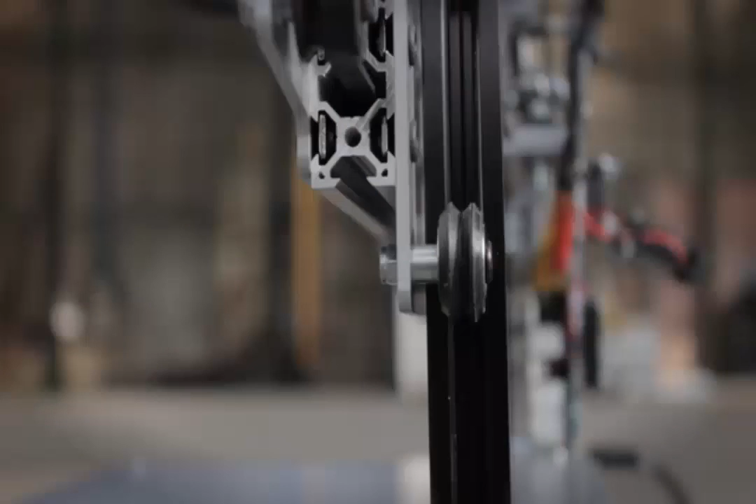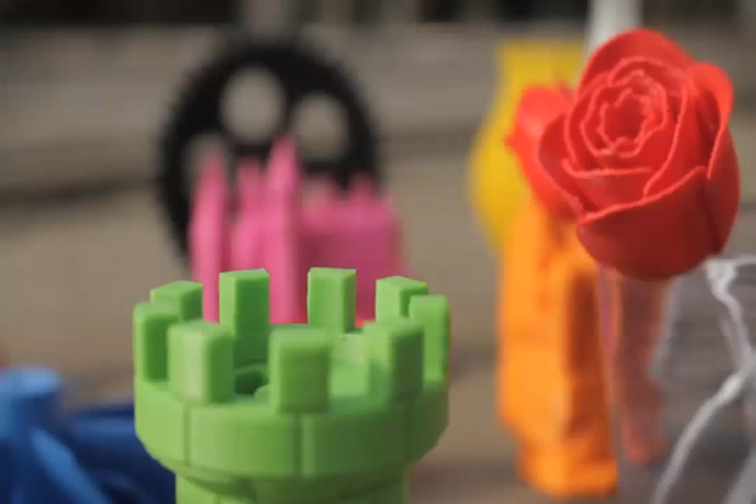Two years ago I saw my first 3D printer and I was immediately intrigued by all the possibilities 3D printing could give you. So I started to build my own printer, and after seeing the prints that came off of the printer, the excitement was even greater than before. It was the first time I could physically produce products at home.

For the last 10 years I worked in industrial automation as an engineer. I designed electronics, software and mechanical designs.

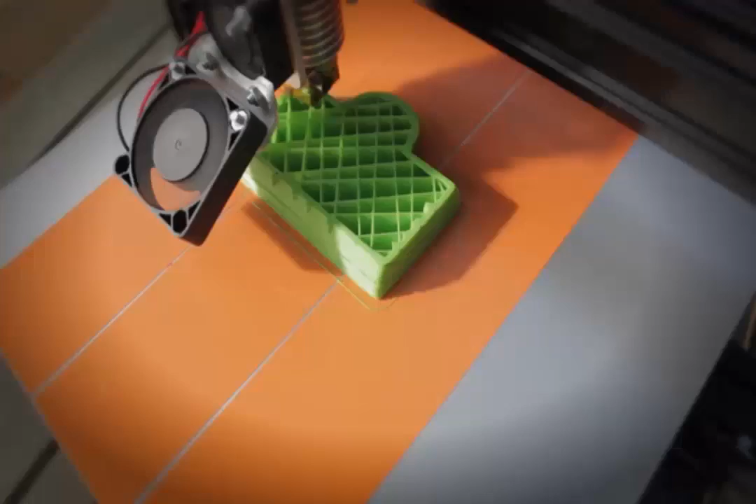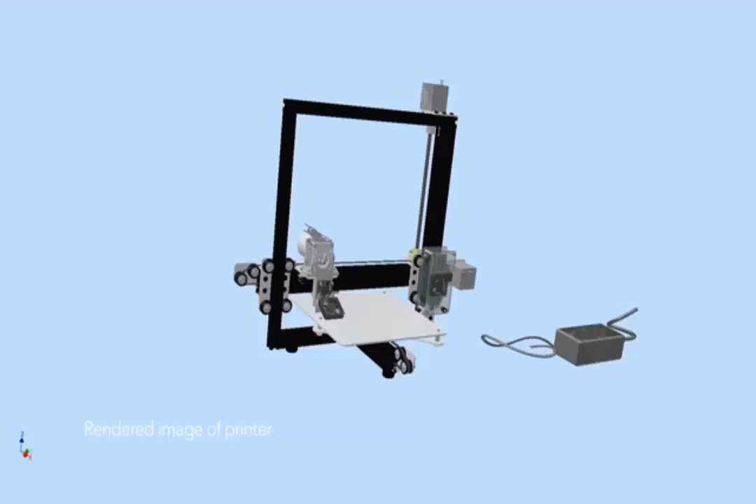Recollecting what was needed to build my first printer and to start using it, I noticed you need some technical skills to complete it and to use it. So with that in mind, I wanted to design a printer that was easy to build and easy to use.

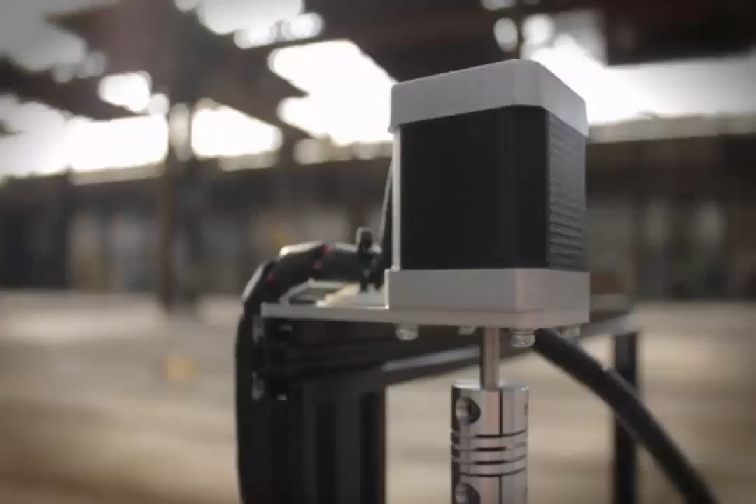So we broke down the printer to its basics, just to focus on high precision, high speed and high quality. The printer is made out of an aluminum frame. It's an open source hardware frame, and together with the laser cut metal plates it makes a rigid printer.

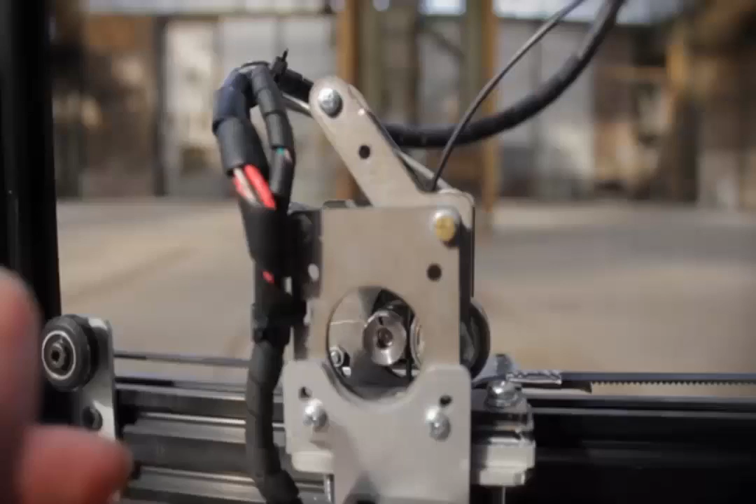We designed a custom extruder drive for the printer, so it is easy to change your filament. You just push back the lever, take your old filament out, put a new one in and start printing again in seconds.

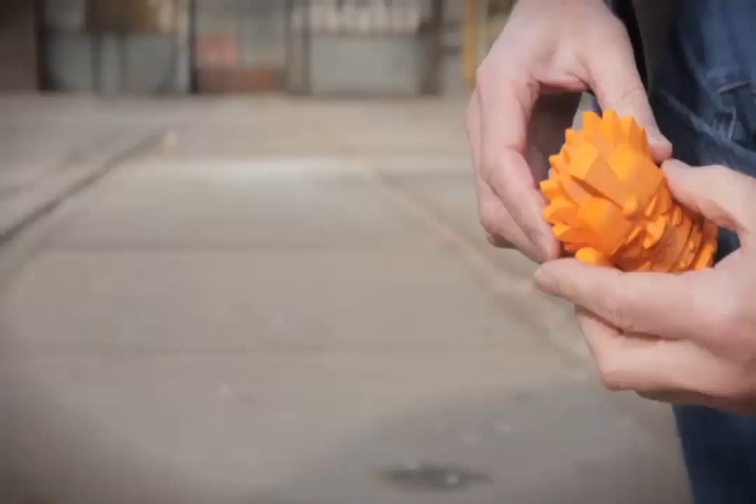So now that our third prototype is ready and finally meets our high expectations, we need your help to not only take it into production, but also share your experience with it. Be part of our community to exchange that experience and give us good ideas to even develop the printer further.

So when you support us, you get a complete building kit to start building your own 3D printer. The kit contains all the electronics, metal parts and screws. We provide you with a step-by-step manual, so you can build your printer in just a couple of hours.

And together with it you get a filament sample package, so you can start printing right away. Step into the world of 3D printing. Start printing your own objects and get inspired by all the great possibilities. Make your pledge today and support us in reaching our goal.

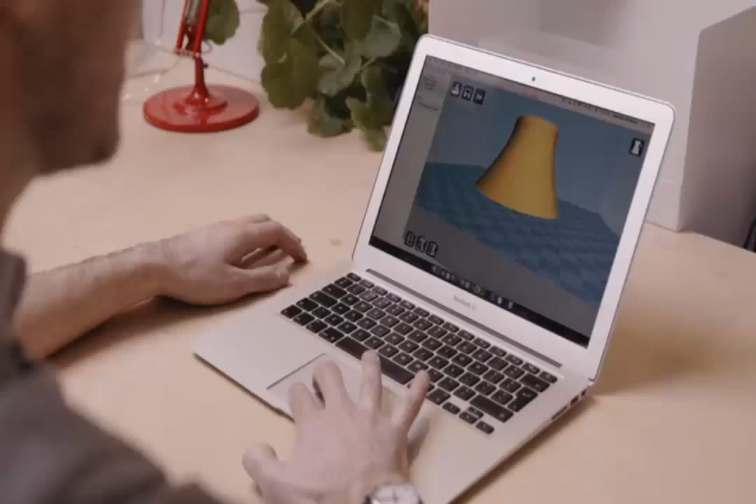Sometimes you don't want to design something from scratch. Explore our online library of projects to see what other makers around the world are sharing. Even use maker machines like your 3D printer with the Formbox. Multiply versions of your prototypes without the wait, and get a factory level of finish from your home or studio.

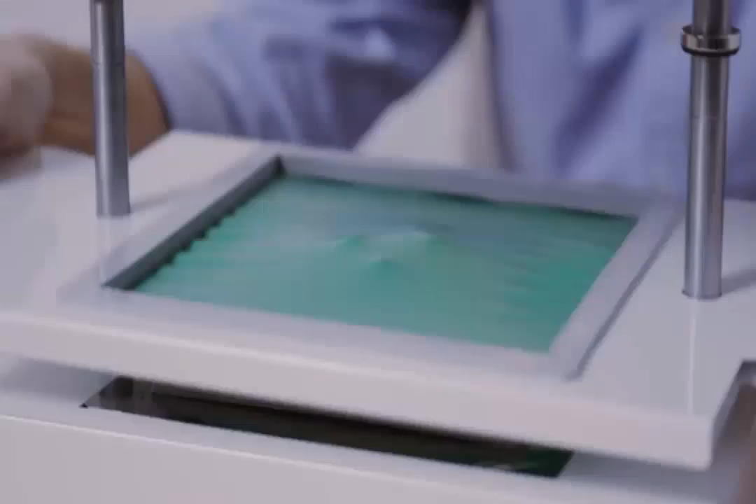We've meticulously designed the Formbox to fit with your life and your ambitions. Making should be simple and not take much time, so you can push the boundaries of what you can make for your customers, your friends, and for people all over the world.

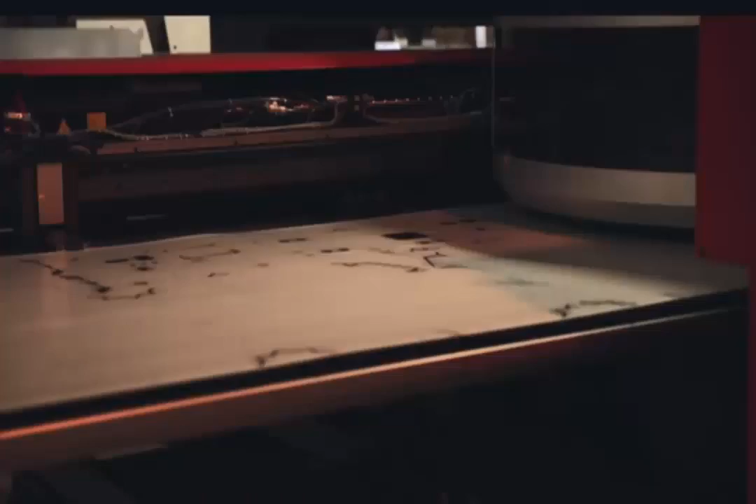We've been testing it with makers and small businesses for the past year and developed a series of prototypes to get to a design we think you'll love. We're working with a great factory. We just need enough orders to start the first production run. And with your help, we can get the Formbox into the hands of makers everywhere.

We want to bring people closer to how their things are made and give them the tools that they need to create their own things, to turn their ideas into reality. And we need you with us to make this happen.

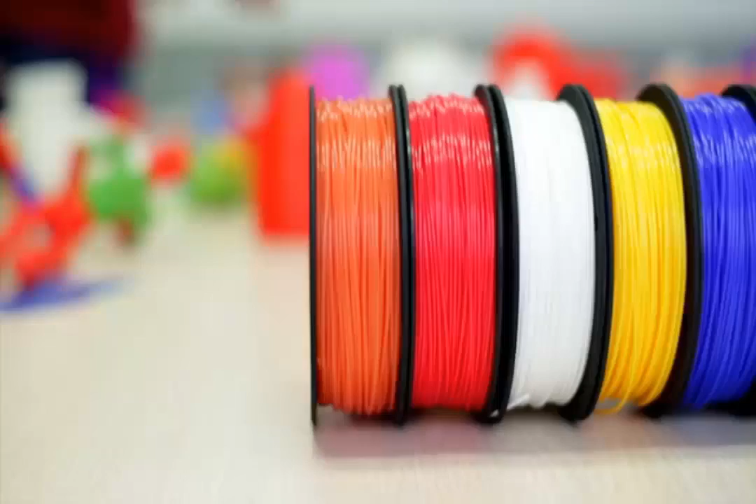We love the design of the 3D printer. The fact that the mechanical parts are hidden makes it really kid-friendly. The different materials, like soft PLA and the FlexiPlate, offer a variety of textures, making the learning experience a lot more dynamic. We also made sure that printing is easy with one-touch printing.

We've been developing the prototype for more than 1 year. With our team of dedicated engineers, we were able to accumulate 2 registered patents and 10 patent-pending technologies to build the safest and first ever kid-friendly desktop 3D printer.

It's pretty cool because you can make many things with it, and by many I mean almost everything. Parents everywhere can feel better knowing that their child can understand and use this technology that's already changing the world.

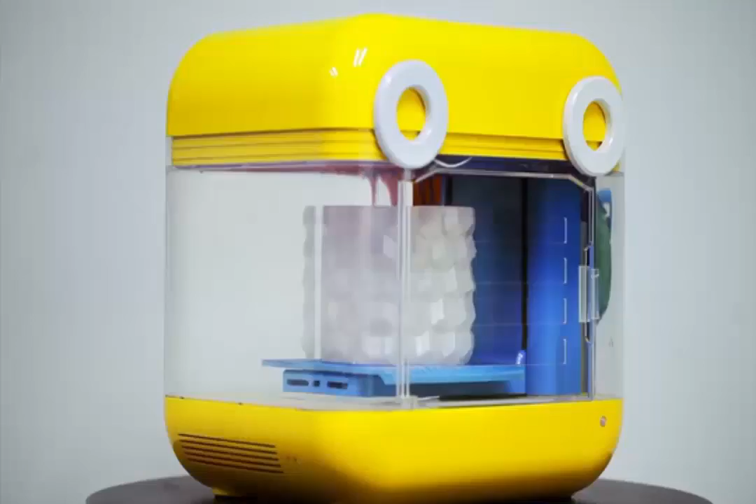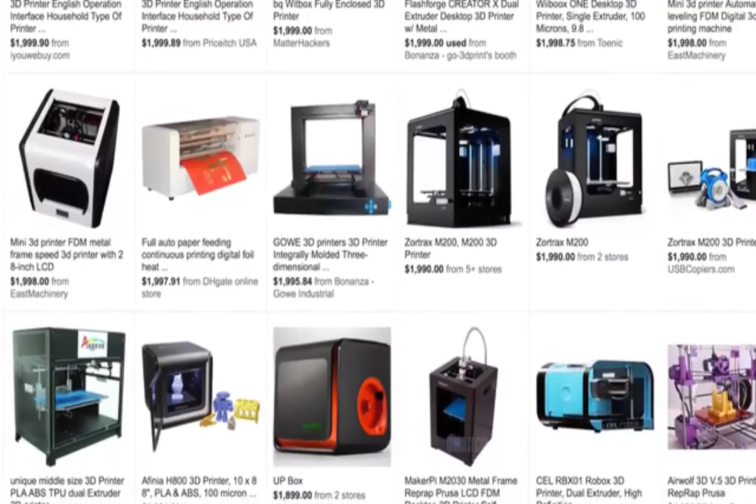3D printing is great, but often inaccessible. Until now, 3D printers have cost over $1,000, and that's just for the most basic versions. At Anvil, we've set out to change all of this. Our 3D printer is easy to use, and at a $299 price point, it's affordable enough that any family can own it. But most importantly, the print quality is incredible.

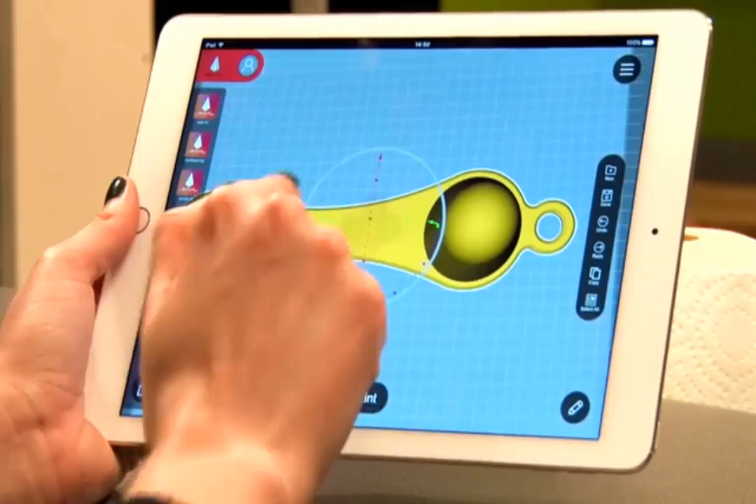We've set out to provide the best user experience of any 3D printer. Unlike other tricky and hard-to-use 3D printers, Anvil is ridiculously user-friendly. For example, it's incredibly easy to load. No more complicated and inconvenient insertion processes like traditional 3D printers.

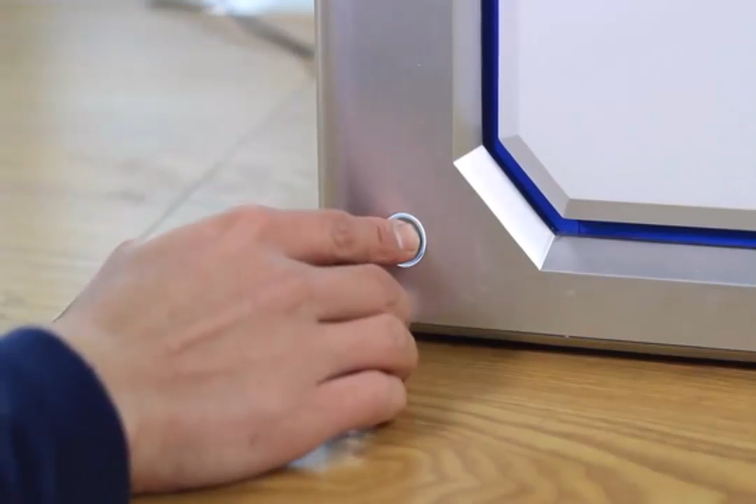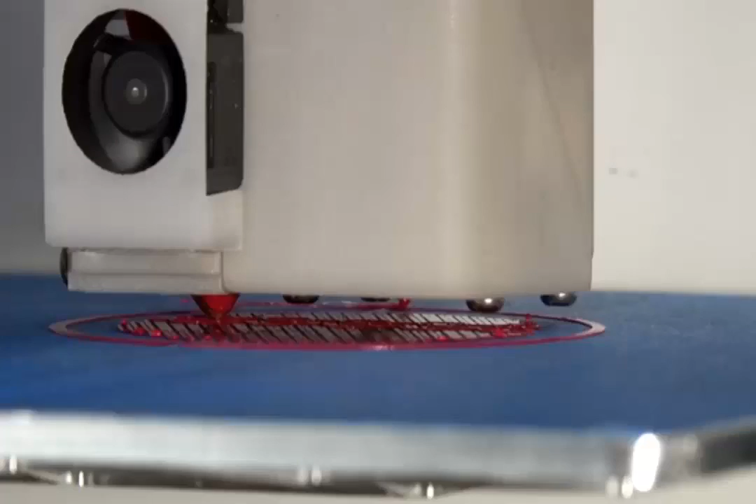Even better, all you need to do to operate Anvil is press a single button. We've designed our printer with an enclosed compartment so you're protected from any heat-related injuries. We've designed every feature with you in mind so that you can create anything you can imagine without any training or previous knowledge of 3D printing.

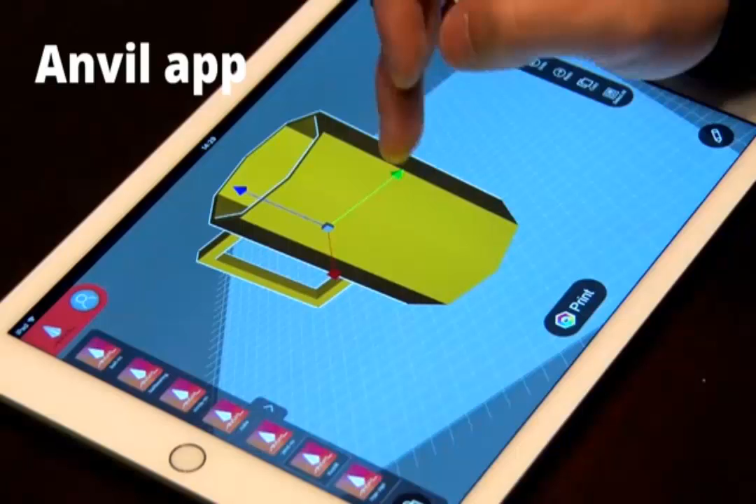Our printer allows you to design anything using our app. We've built the software to look like Legos. You put your design together on an iPad using blocks and then print your design. Our app is the key to turning your ideas into reality. And we've made sure it's easy enough for everyone to use without any prior experience.

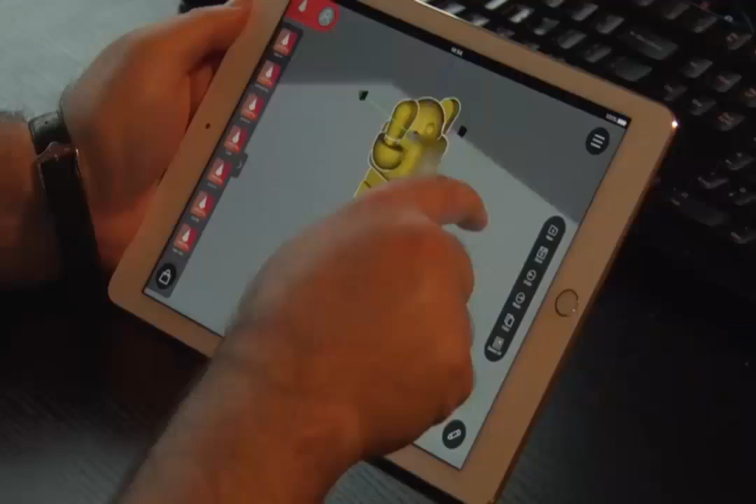As long as you have access to the internet, you can control your Anvil 3D printer. Now you don't have to wait until you get home to make your great idea come to life. It's as simple as opening up the app and clicking print. You'll never be caught unprepared again. If you're thinking of something you're missing, just print it.

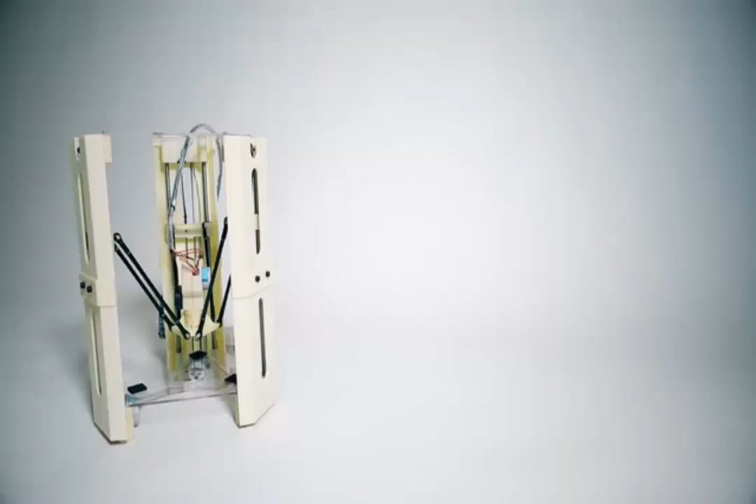What if you could, with a few clicks of your mouse, 3D print a toy for your child in the comforts of your own home? What if you could create gifts for your friends in minutes? Introducing the 101 Hero Mini 3D Printer, the most affordable 3D printer in the world.

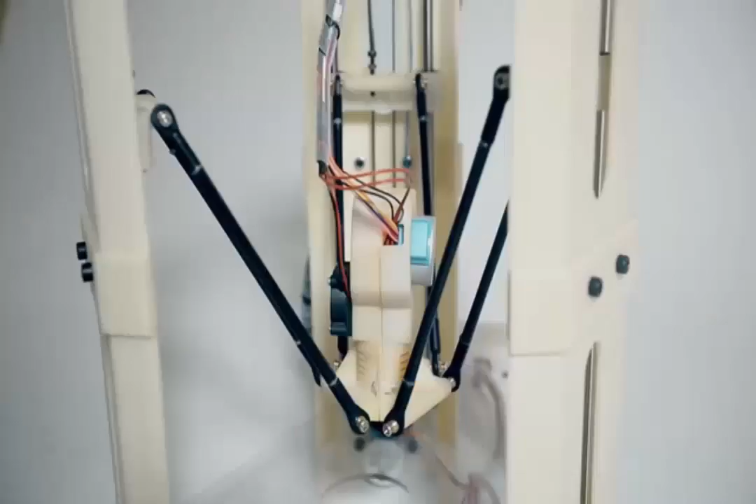We've worked with the best in the industry to ensure a compact and easy-to-use design. Simply turn it on, insert a memory card, and print anything imaginable. The beauty of the 101 Hero Mini is in its simplicity. All you have to do is download one of thousands of lab-tested G-code files from our website, save it to your SD card, and make it real with one touch.

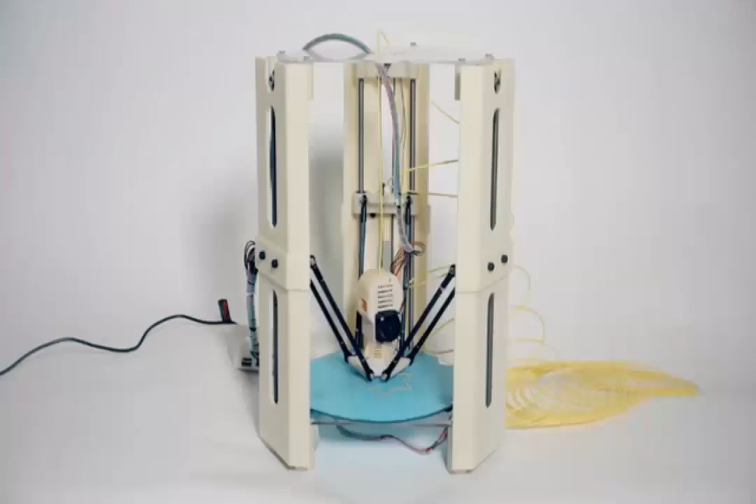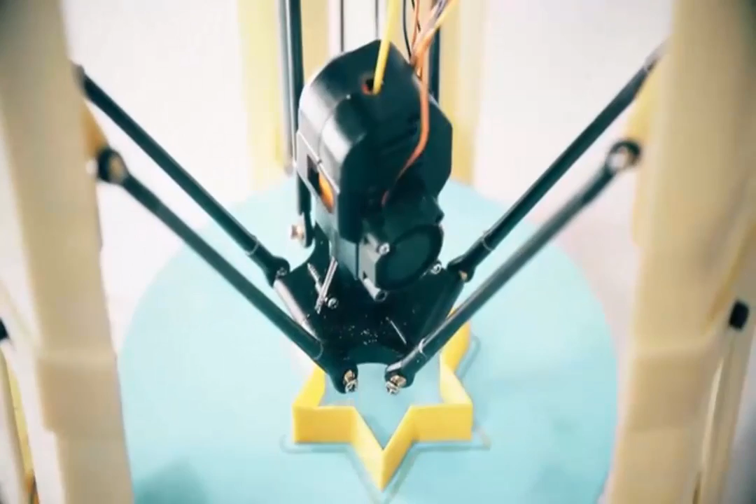We think that everyone should have access to 3D printing technology, and it's for this reason that we've made the 101 Hero Mini, the most affordable way to 3D print. The Hero Mini uses a new technology to drive the plastic extruding motor, and we've come up with many innovations in the structure and design of the printer itself. With these adaptations, you're able to have the same functionality of a high-end 3D printer, but for a fraction of the cost.

Meanwhile, we've also worked hard to ensure a safe design, so the 101 Hero Mini can be enjoyed by the young and old alike. The 101 Hero Mini represents an entirely new medium for kids, engineers, artists, and makers.